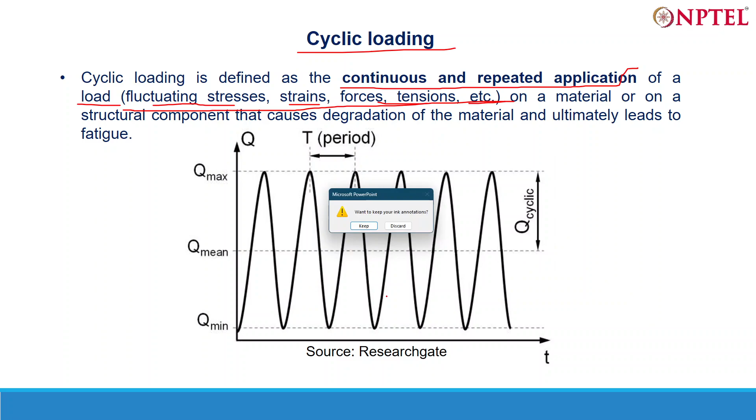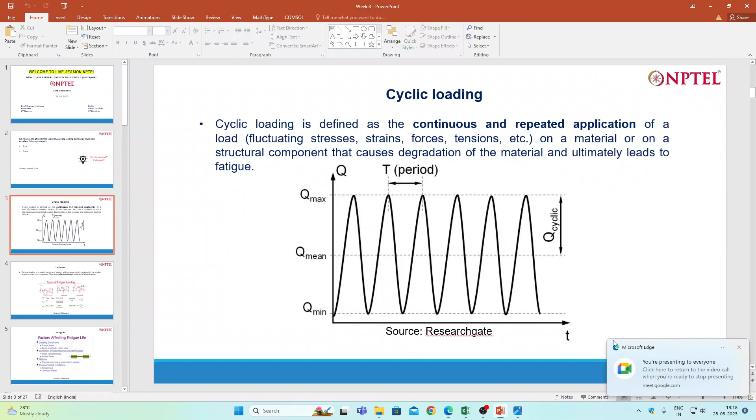On a material or on a structural component. So what is a structural component here? Material, anything can be called material. Basically, it can be metal, non-metal, ceramics, everything. Or on a structural component. So when we have links and joints, overall these things are called structures, made up of links, joints, various bends. They can have movement with respect to each other, or they can be fixed also.

So that causes degradation of the material and ultimately leads to fatigue. So cyclic loading is something that leads to fatigue. Cyclic loading and fatigue are not so much different; they are very much interrelated to each other. This graph has been taken from ResearchGate. I put this graph to make you understand what can be called cyclic loading. How does it look like?

So there must be a load. There must be some minimum load and some maximum up to which it can go. And in between minimum and maximum, there will be a mean load. This is a graph in which the x-axis represents time and q you can take as load here. So in between minimum and maximum, there will be a mean load. About this mean load, the load will be fluctuating like this.

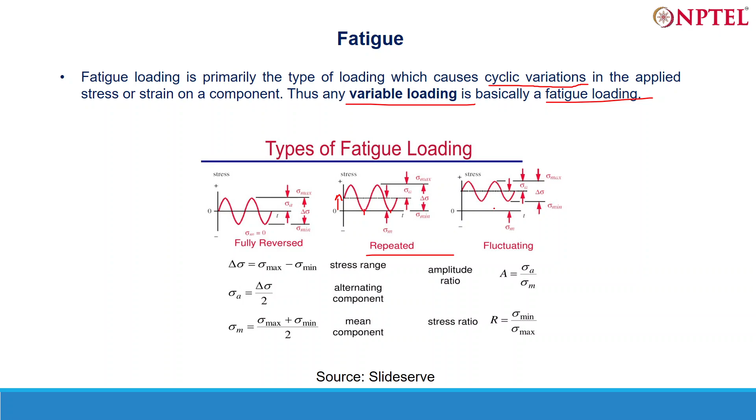I think these two graphs are very much related to each other. Not much difference can be seen between these two graphs, but in fluctuating there is actually a fluctuation in the value of load. So now you have a much clearer understanding of what is cyclic loading and what is fatigue. So this question: the blades of windmills experience cyclic loading and hence must have excellent fatigue properties. So it's true. I've also put some extra information about fatigue so that you guys can have a good knowledge about fatigue.

If there is any question asked in the exam, you can easily answer. So, factors affecting the fatigue life of the component. There must be a loading condition, like the type of stress. What is the type of stress, like compressive stress or tensile stress? What is the amplitude? Amplitude is how much is the variation, the maximum variation of the stress. Mean value, how much is the mean value?

Condition of the specimen or structural member is also a factor, like a corrosive member cannot have a very good fatigue life, but it can fail. So stress concentration, surface finish, corrosion or something. Material: what is the type of material? Thermal: how is the thermal history of the material, like grain size in the metals.

You will study more about this grain size when you go through the crystal structure of the material, the lattices, everything. Environmental conditions: temperature actually affects the fatigue life of the material very much. So there is a creep stress that comes into this picture, but we'll not go into much detail on creep stress and we'll focus only on fatigue life. Corrosion effect, as I said earlier, affects the fatigue life of the material.

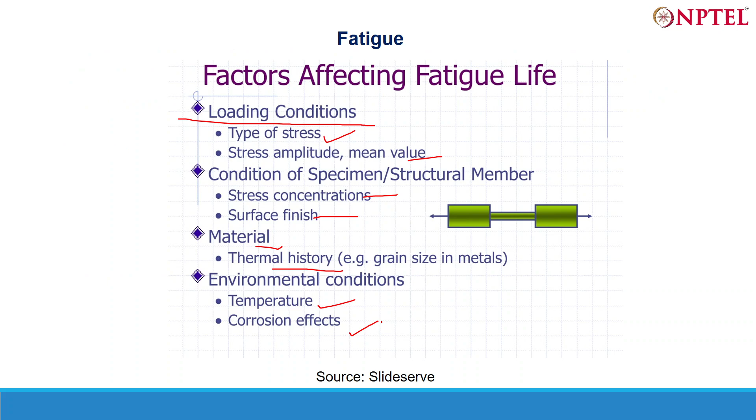Okay, so this question is over. If there are any doubts you want to discuss regarding question one, you are welcome to ask. I will give you some time to focus on these three slides, so that you can ask your doubts. Okay, there are no questions. Okay, so no questions now.

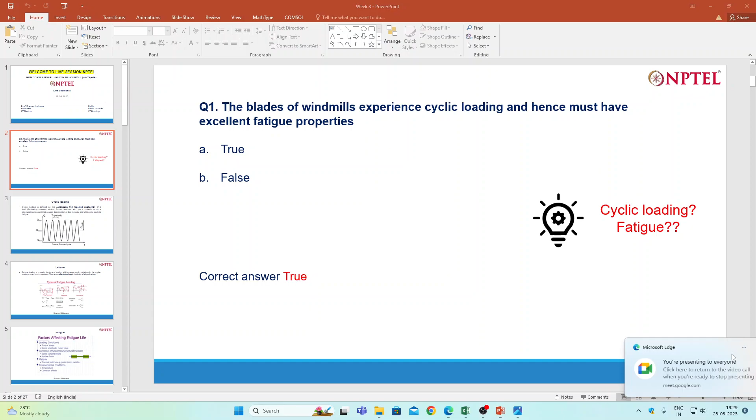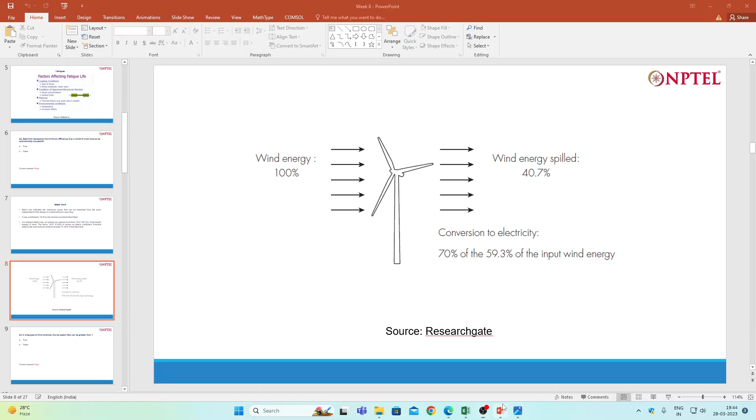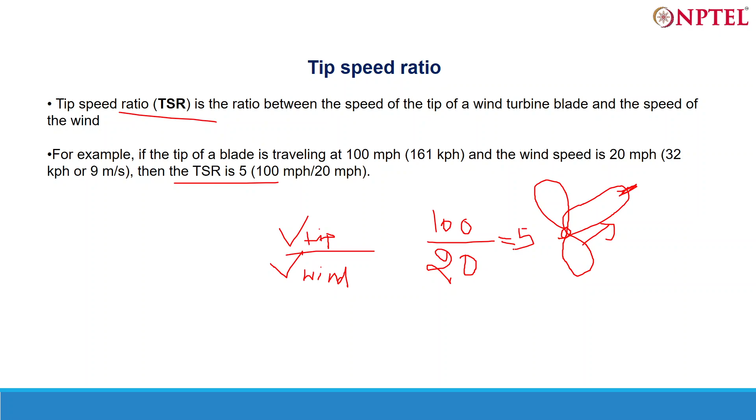So basically, let's see if this is a wind turbine. At the tip, what is the velocity? Divide it by the velocity of wind, and that is tip speed ratio. It's a very important concept. For example, if the tip of a blade is traveling at 100 miles per hour and the wind speed is 20 miles per hour, then TSR is 5: 100, the velocity at the tip, divided by 20 equals 5.

Now this question was about drag design. For the drag type of turbine, V tip upon V wind is less than 1. V tip at its maximum can only be as much as V wind. So typically the ratio is less than 1 for drag type of wind turbine. If you divide V tip by V wind, it will be less than 1. So I think you must have got it quite clear.

So before moving to question 4, this is an important concept, so I will wait for your questions here. If there are any queries or questions, please feel free to ask. Okay.

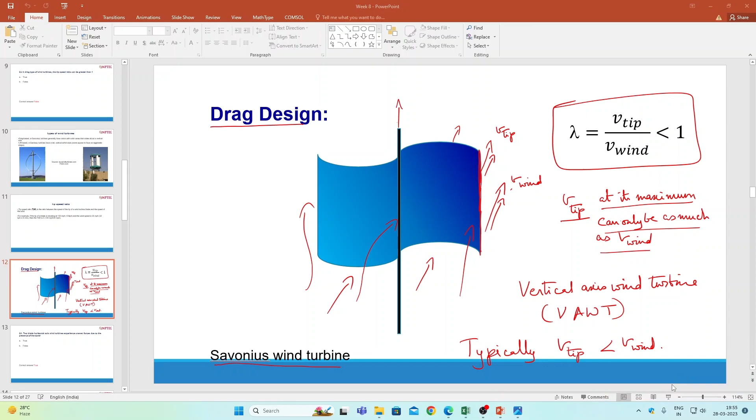So basically it's asking that a two blade horizontal axis wind turbine experiences uneven forces due to presence of tower. Okay, so yeah, this is actually a true statement. So basically horizontal axis wind turbines have this type of shape, and these are the blades. So it basically experiences uneven force due to presence of tower. A tower is there in this direction.

So basically there is a force here, mg, for this tower, and the force drag here, drag. So it's basically uneven type. Okay, so it's quite a true statement.

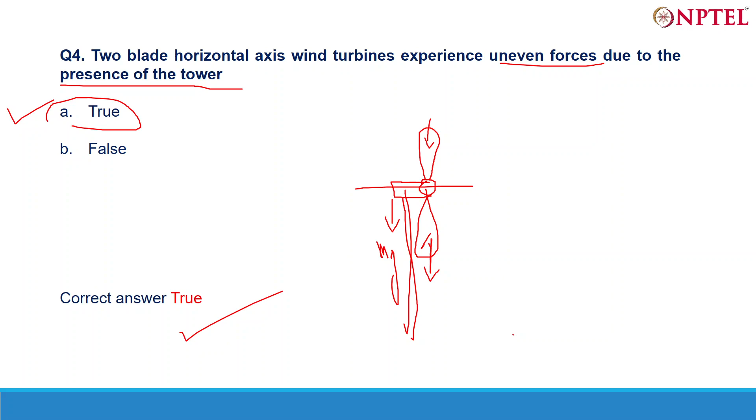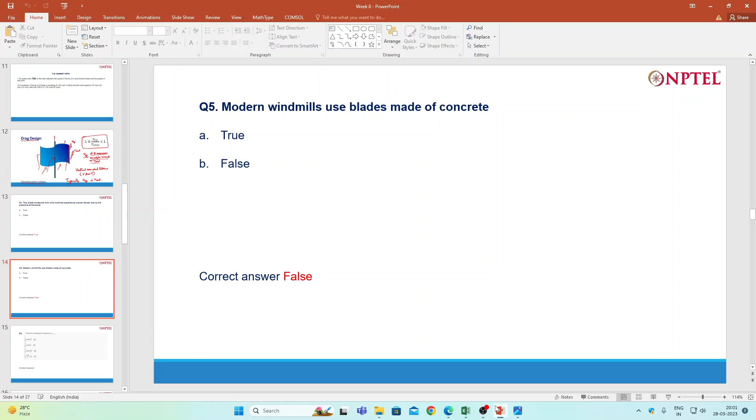So please have a look at this question for some time, and if there are any queries, please feel free to ask. Okay, now moving to the next question. Let me see if somebody wants to join. Okay, no one wants to join. So moving to the next question.

Modern windmill uses blades made of concrete. No, they don't use blades made of concrete because concrete has a very high material density. If such high material density blades are used, then blades won't be able to move. So something which has a very high strength to weight ratio is used. Basically, a composite material is used to make blades.

Stainless steel is also preferable. Aluminum blades are also there. So aluminum, stainless steel, composites. So these blades are actually preferred rather than having a blade which is concrete. Okay, so this is basically a false statement.

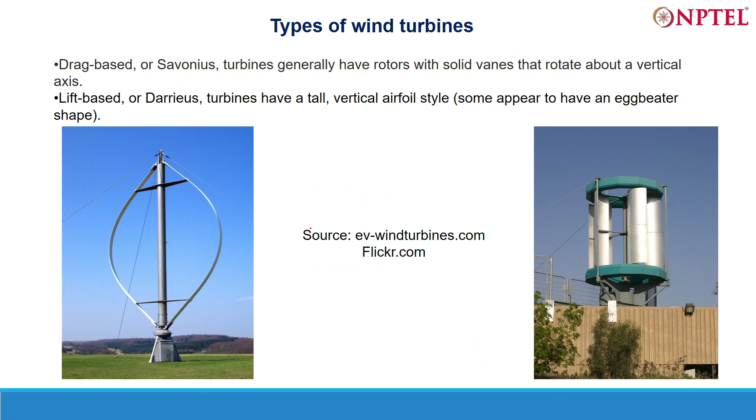Okay, so I think with this the non-graded part of the assignment is over. So I will suggest you guys go through question number one, two, three, four, five. So you will have a good understanding of the different concepts here. Then we will move to the graded part of the assignment, from question 6 to question 15. We have the graded part of the assignment here. So now we will discuss that only. Okay.

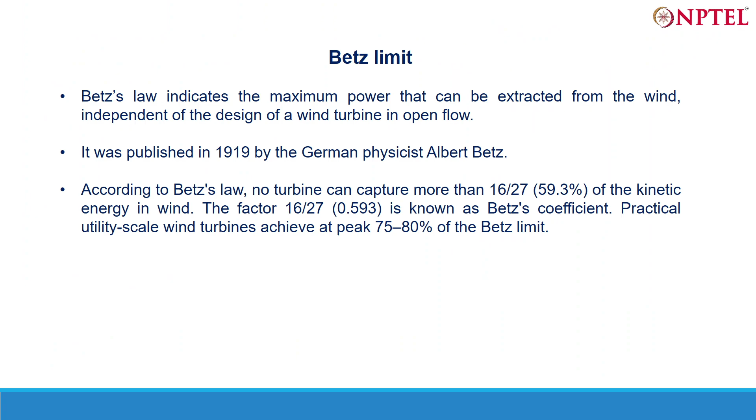Okay, so we have completed our non-graded part of the assignment. Now we'll move towards the graded part of the assignment. So these questions are basically conceptual questions. So if you have your concept clear, you can easily answer. So the formula for calculating the wind power, you have seen in the weekly lecture slides itself, is basically half rho A V (V1 square minus V2 square). Okay. So even if you don't know the formula, it can be very easily derived.

It's basically derived from the kinetic energy. So kinetic energy is basically half mv square. M is basically density into area into velocity, rho AV. Okay, so this term half rho AV and then this V1 square minus V2 square. So it was quite easy. The correct answer is answer C.

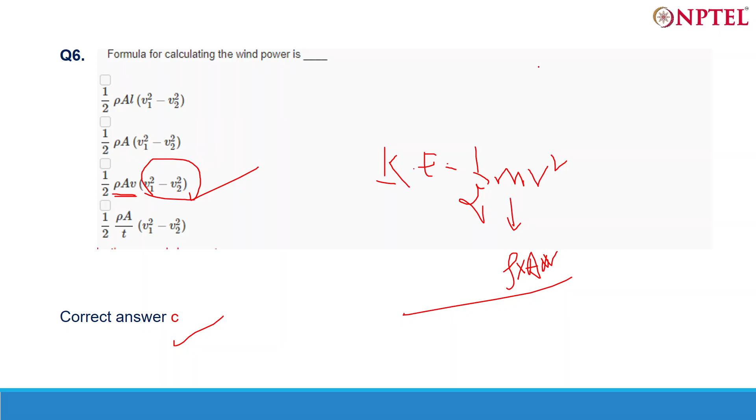Okay, moving to the next question. If V is the velocity of the wind, the energy available in the wind is proportional to. So, in the previous question also, I think we have seen that energy of the wind is basically kinetic energy of the wind. So, it's proportional to half rho A V square. So this V square is basically this. So the correct answer here is answer B itself.

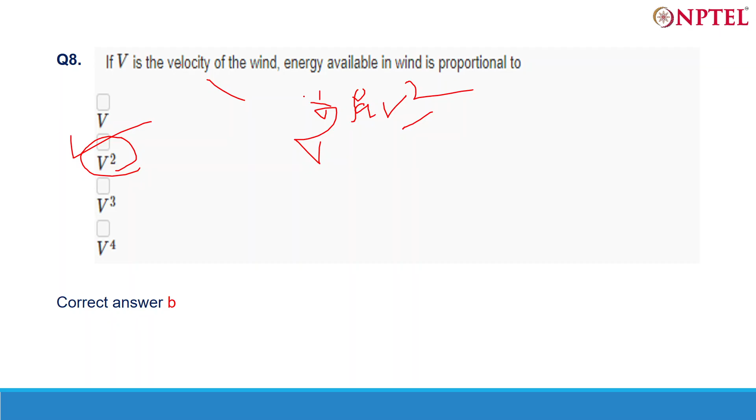Moving to the next question, if the wind velocity is 20, then tip velocity can be 60. Yeah, it can be. There were two types of turbines, lift type and drag type. So for lift type, the tip speed ratio can be greater than 1. So yeah, wind velocity is 20, then tip velocity can be 60. It's a true statement, okay? So it's true.

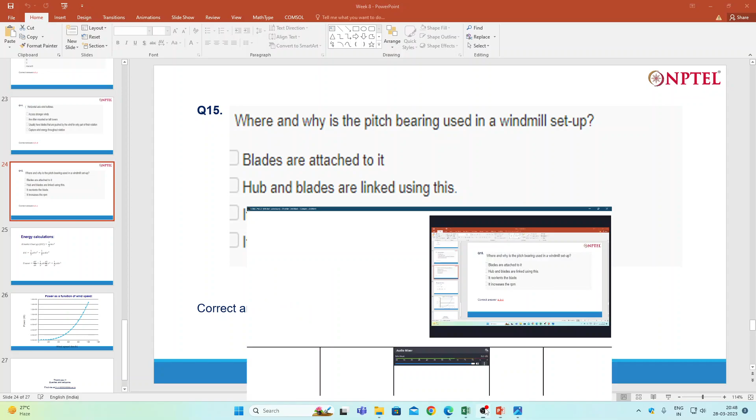Okay, so with this, all the questions regarding the graded part of the assignment are completed. And we have some time left, so we'll discuss some concepts here. I have added two slides regarding the concepts. After that, we'll end this session. I want you guys to focus on the last two, three questions. And if you have any queries, you can ask here.